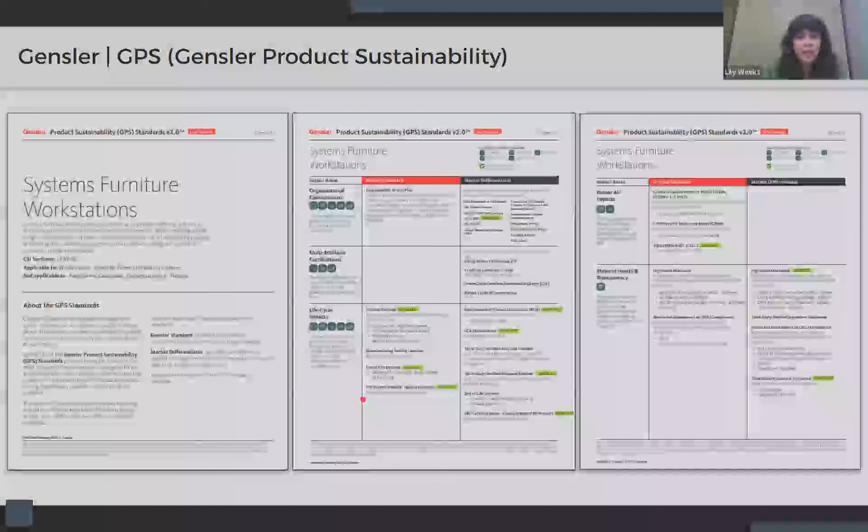But one of the exciting things I found is they're really starting to tackle sustainability standards for systems furniture in a way that has a minimum standard and a market differentiator. I think this is probably the most comprehensive market signal I've seen from the A&D side that really gets down to the brass tacks of things.

I know in my time at WRNS we created something similar, but more from the architectural finishes and interior finishes standpoint. Now we're really starting to see what we were seeing in the material standpoint start to permeate the furniture industry, which is very exciting.

I call these market signals because oftentimes these things can be aspirational, but these are the things that really move markets and make manufacturers take notice—if large architecture and design firms are seeking these aspirational ideas for systems furniture, they're likely to move forward and respond with their upcoming products.

And all of this is available on Gensler's website, and it's open source. So if that's something you'd be interested in seeing for your future projects, it's kind of interesting to read.

The second section I'm calling Design for Disassembly. As I had mentioned, last week I was in Chicago. Every year there's a furniture event called Neocon, which is the Super Bowl, if you will, of the furniture industry, where all the new product ideas and thinking behind commercial interiors as they relate to furniture are shown.

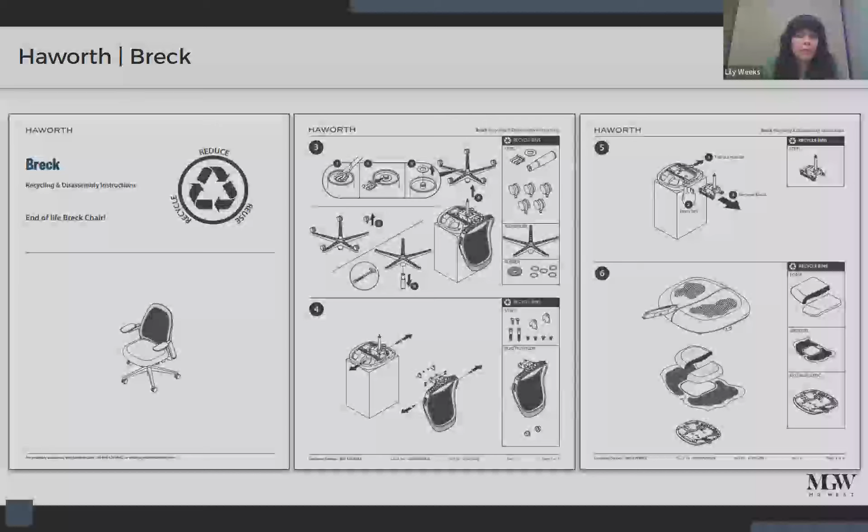Moving towards a great product category—this is that task chair, and on their website, what I found interesting is you can talk about design for disassembly, but at the end of its life, does the person, the facility, or the owner really know what to do with it? So this chair comes not only with assembly instructions, but disassembly instructions, which I have never seen before on a piece of furniture. That was exciting to me, seeing how this chair disassembles. It starts to outline the materiality of each type so you understand where it can go as you're thinking about its end of life.

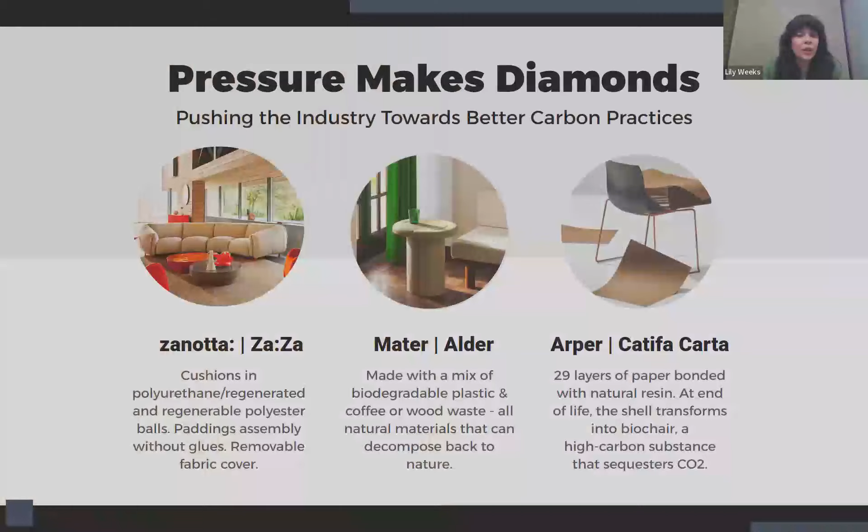This next section is very similar to the last one, but not necessarily about disassembly—just thinking about how, as we apply pressure to the industry, we can really be part of creating interesting and beautiful products that we want to include in our projects. Two of these manufacturers we saw earlier, but certain manufacturers had more of an ethos towards it, so they might have different products that address carbon in different ways.

For example, Zanotta—this is the Zaza sofa—and all of their sofas had fully removable covers. I'd say over the last maybe 3 years, I started seeing more removable covers on things, for a few reasons: cleaning, and being able to have things reupholstered more easily. Oftentimes with commercial furniture, if you want to reupholster something, it actually can't be, unless it's done in the factory because of the way it's made.

So it's really interesting to start seeing more manufacturers adopting removable elements to give flexibility in the future. I don't know a ton about what makes these foams more sustainable, but I've been hearing a lot more rumblings about the types of foams used in sofas. I also just really loved this sofa because it was very comfortable and also very striking.

This center table is related to that chair we saw earlier. It was designed by Patrizia Ercolia and won a lot of design awards. This is also one of those biodegradable plastics, made out of coffee and wood waste. Really beautiful design—it comes in olive, terracotta, and a mauve tone, which is interesting.

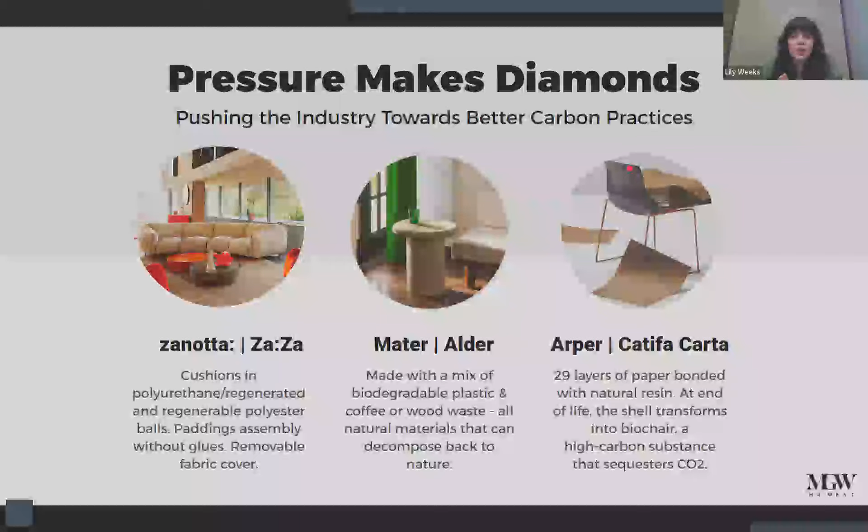But this chair was really interesting because it's made entirely out of bonded paper and natural resin, so it can sequester carbon. They brought the chair into the office and had a piece that was half bonded and half unbonded, so you could see the paper as it was compressed together, which was really interesting.

The other thing I liked about this product was that it inherently took the materiality, the inherent quality of the paper they were using, so it only comes in one finish, which almost looked like leather. But I thought that was really cool because that tells the story of the materiality and that we are specifying things that have a connection to the original intent.

One of the interesting stories as well was the end of life management. At the end of its life, it transforms into biochar, which sequesters CO2.

Really interesting story that Arper has a chair that's just called Catifa, and one of the things that they're doing is taking some of their historic product and figuring out how to make it more sustainable. On some other products, they're starting to remove the staples, the glues, thinking about the materiality of things while still maintaining the integrity of the design. So I'd recommend that one.

And then I wanted to add some strategies here at the end. In 2020, I was interviewed by Metropolis magazine about my experience going to Greenbuild in 2018.

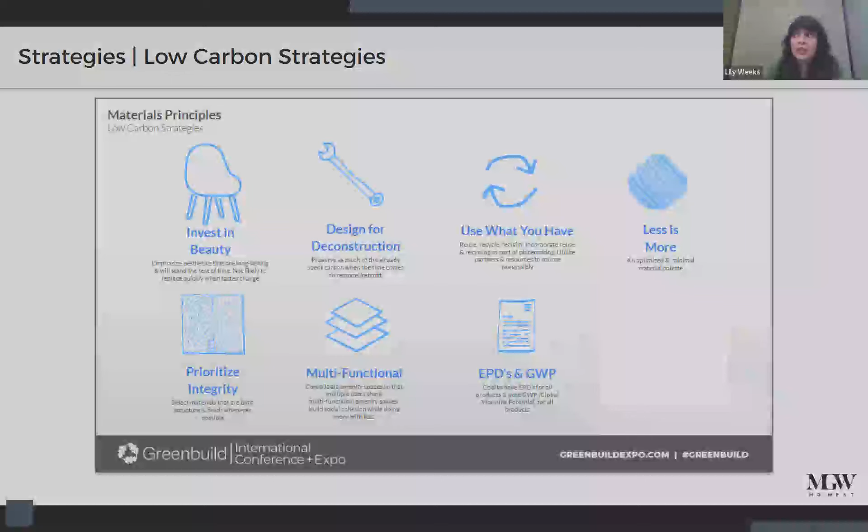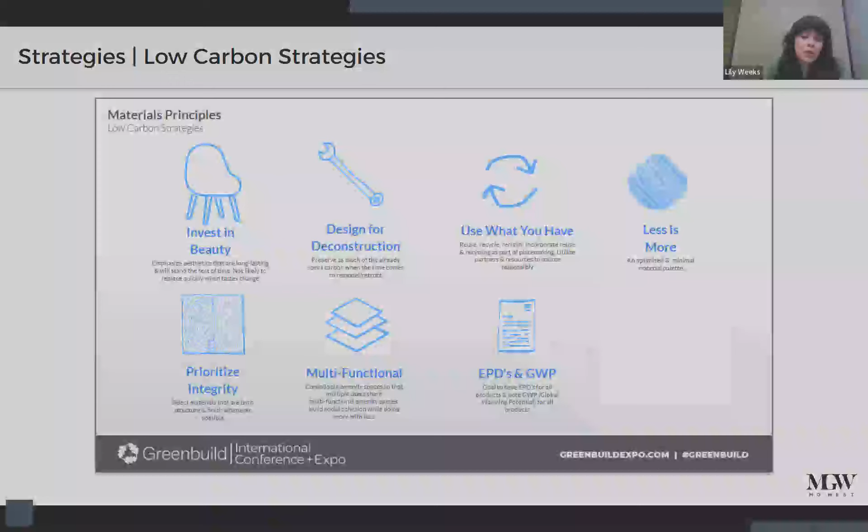And then you can ask for EPDs for furniture. Not everybody has them, but more manufacturers are starting to provide them. There's significantly more product and it changes rather quickly. So you can ask. They are not always available, but it is interesting to see that it's moving in the market. Maybe 7 or 8 years ago, I couldn't find an EPD for an interiors product, and now they've become very ubiquitous. So you should always ask.

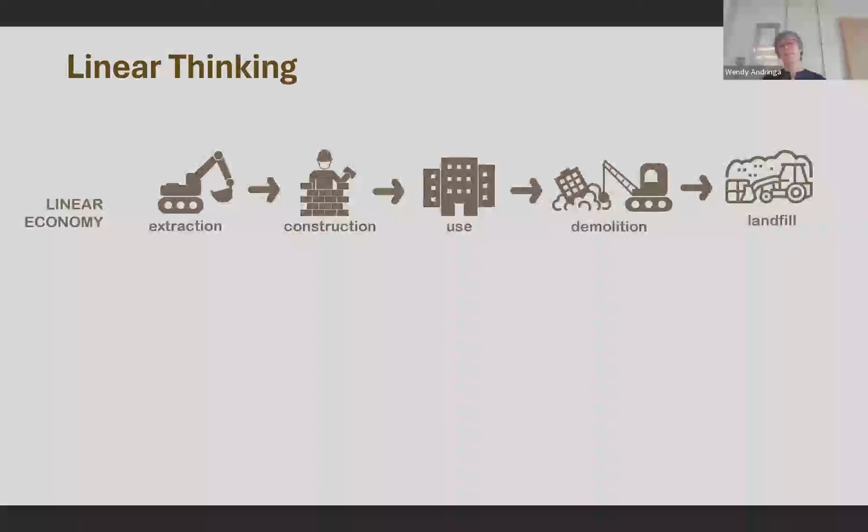So I wanted to start by just talking about circular thinking because I'm going to share a lot of our work that incorporates reuse of materials. And I wanted to talk about how salvage and reuse is one effective path towards decarbonization in our work. So the status quo that is just omnipresent right now is linear thinking, and that involves extraction. And also, after materials serve one use, they are demolished and go to landfill. And this is basically take, make, waste.

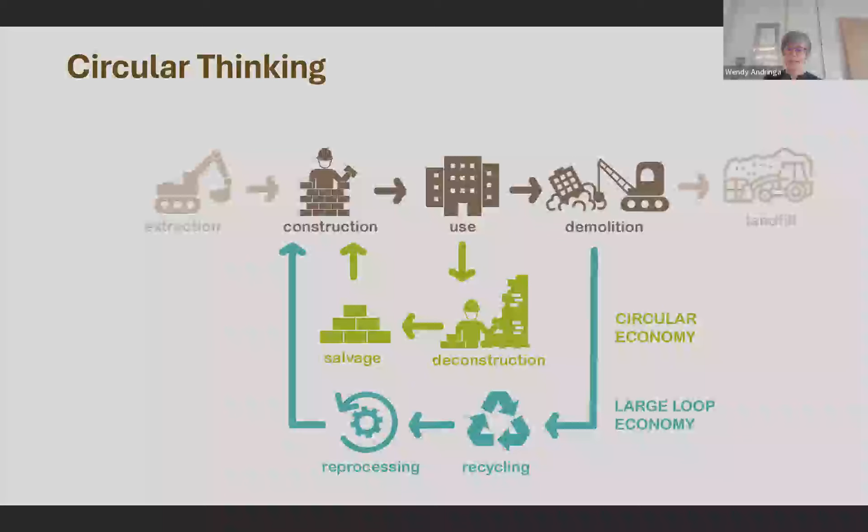And so this circular thinking is eliminating, as much as possible, the extraction of new resources and also diverting material from landfill and keeping it in two types of loops. The circular loop is deconstruction instead of demolition, going to salvage and reconstruction, or else the large loop, which is recycling and reprocessing materials that go back into new construction.

And so what we're interested in at Assemblage is really how do we make landscapes from deconstructed materials? So a lot of materials that are not sufficient structurally for reuse in structures are perfectly fine to reuse in landscape. And so that's really what we want to capitalize on, how do we recoup that material, and we're also always moving towards calling it resources and not waste.

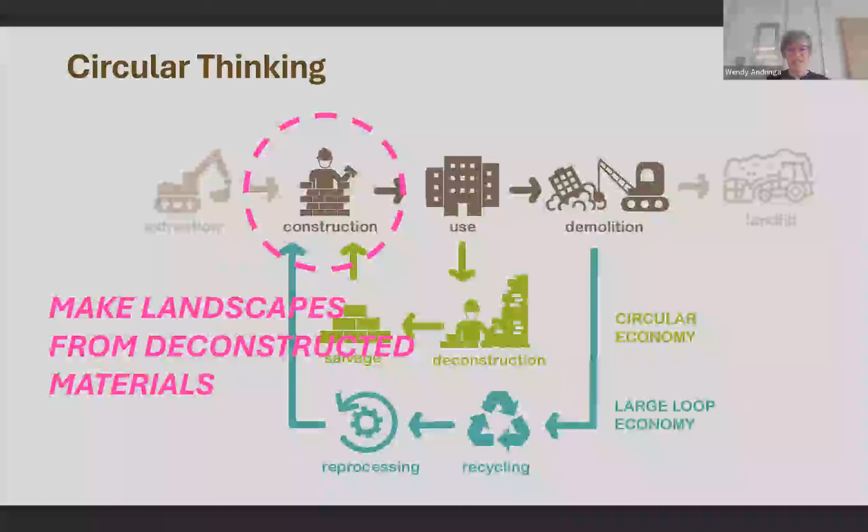So Laura asked for me to present some sort of ninja tactics, and I'm going to start with a project, a small community park that we designed in Gowanus, which really was all about being resourceful and using as much of the resources that were coming from large-scale demolitions in the neighborhood around us, in order to be resourceful and also creative. So everything you're looking at here in our project was salvaged, reused, or got procured from a city agency such as OER that reuses soil and things like that.

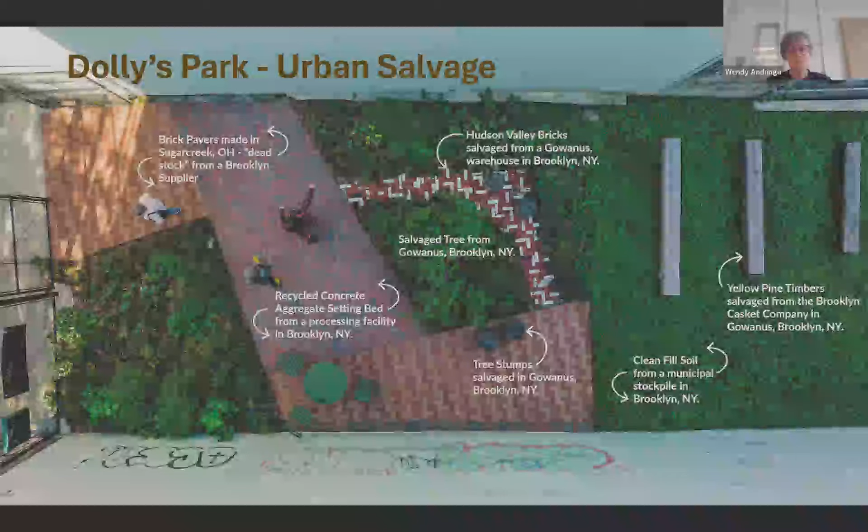I'm going to talk about two of the more salient features here in the project, and one was the timber benches. We reclaimed wood from the South Brooklyn Casket Company that was being demolished a block away from the park. We kind of stalked this demo project as it was underway. And we were very stealth about getting over there to find out from the site supervisor if we could have access to some of those timbers for a community park. And ultimately, they agreed.

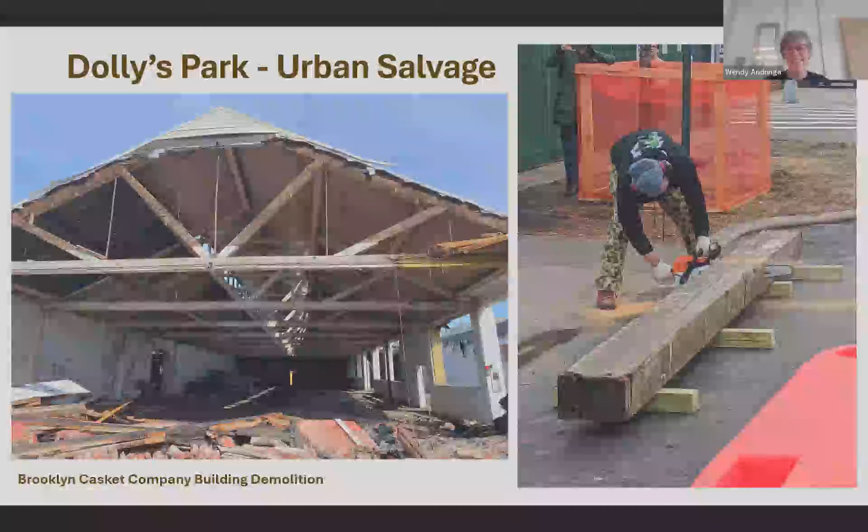And here you have it. This is about as ninja as you get, cutting the beams to size on the sidewalk with a chainsaw. And so this was very successful for us, and it sort of opened the gates for, okay, what else is out there and what else is available.

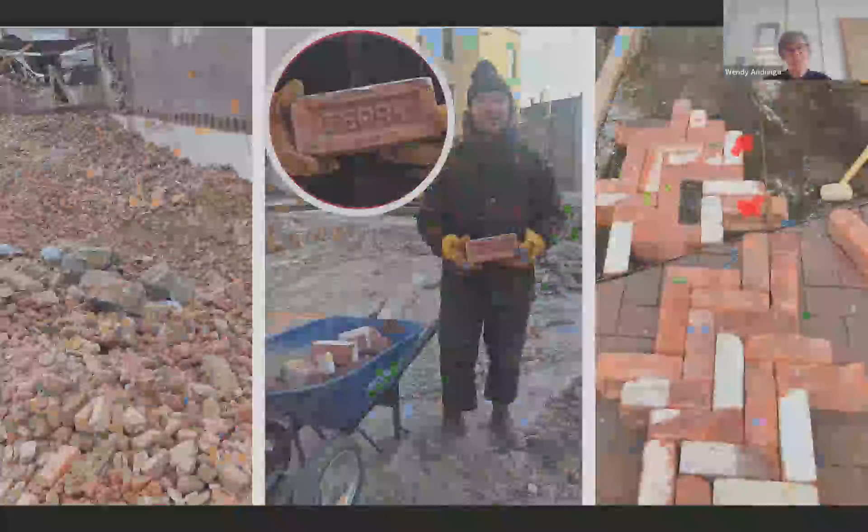We also looked at reclaiming bricks that were there. The warehouses around us were all coming down around the same time. So we worked with Field Form, a design build firm here, and they were very expert at also getting access to the sites. And as you can see, demolition is not very kind to materials. So unfortunately, what they had to do was really glean and pick through all of the rubble. But they did end up finding a lot of material that was fully intact. And we used that to create small garden paths.

We would have liked to have done the whole park with this material, but unfortunately it was very difficult to find enough for the whole park. So this just goes to show you how important deconstruction is instead of demolition. And I wanted to note here, this led to a research path for us about learning about the histories of these materials. In the enlargement there, you can see the logo that's stamped on this brick. The term is a frog, and it basically identifies the manufacturer of the brick. And we could trace this brick back to a brickyard in the Hudson Valley, where most of Brooklyn's bricks came from in the 1800s.

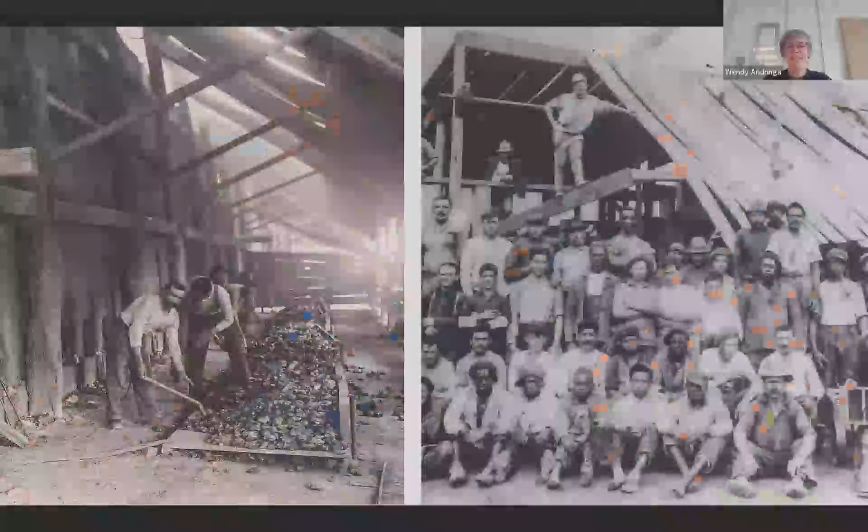So there's history here. If you think about how perfect this unit is and how much labor and carbon actually went into producing it. All these bricks were made from coal-fired ovens, and there was a long legacy of labor. So every time we demolish those bricks and crush them and haul them to landfill, we're sort of erasing a really important part of history.

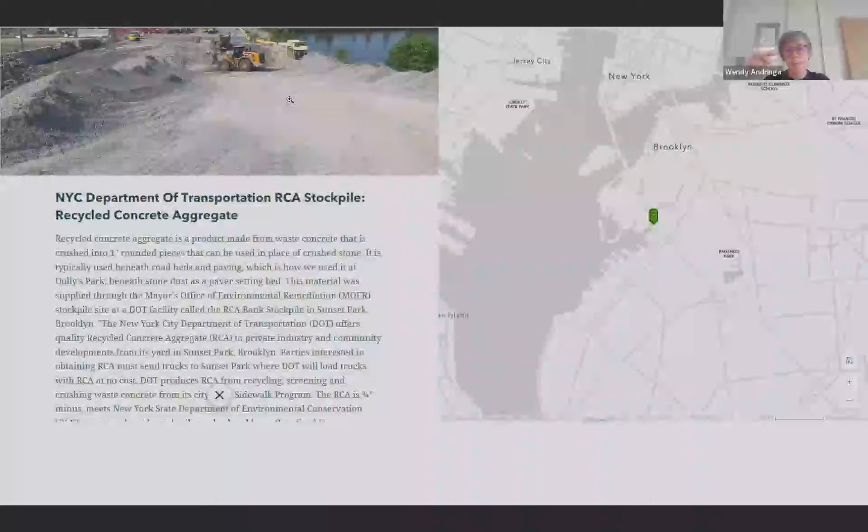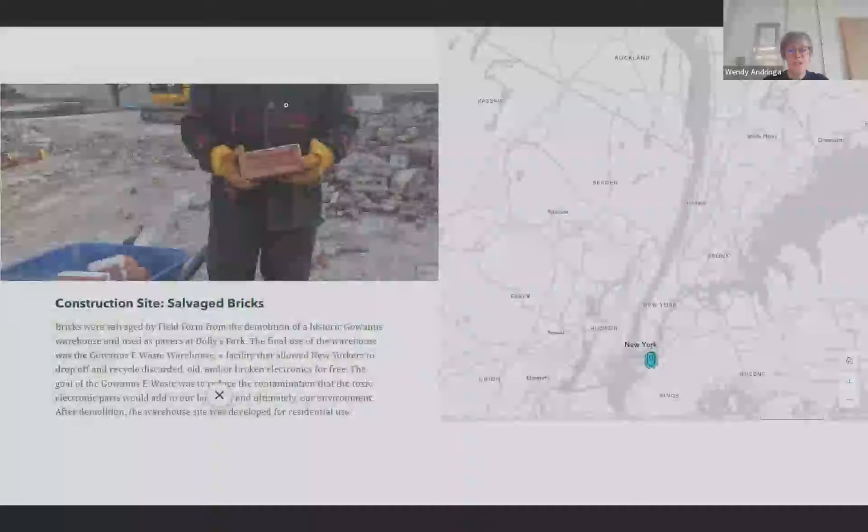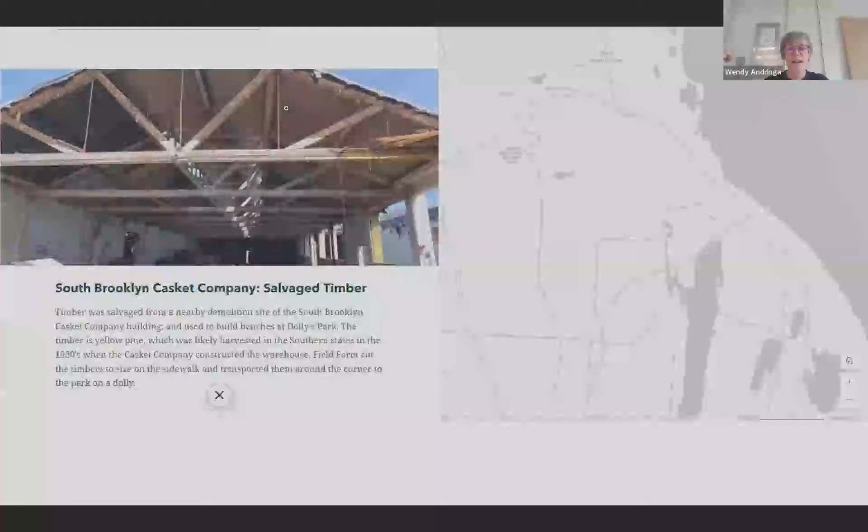So that opened up a process for us of thinking about where did all of the materials in our park come from, and how can we map that? So this is a story map that we created to basically map every single component of the park, from the soil to the concrete blocks, to also tell the story of the salvaged bricks. Even the trees that we planted in the park were salvaged from another lot in Gowanus that was going to become a sewage tank storage site.

I guess I can stop this now, but I just wanted to show a little bit about this process. We just think that tracking materials and showing their histories is really important.

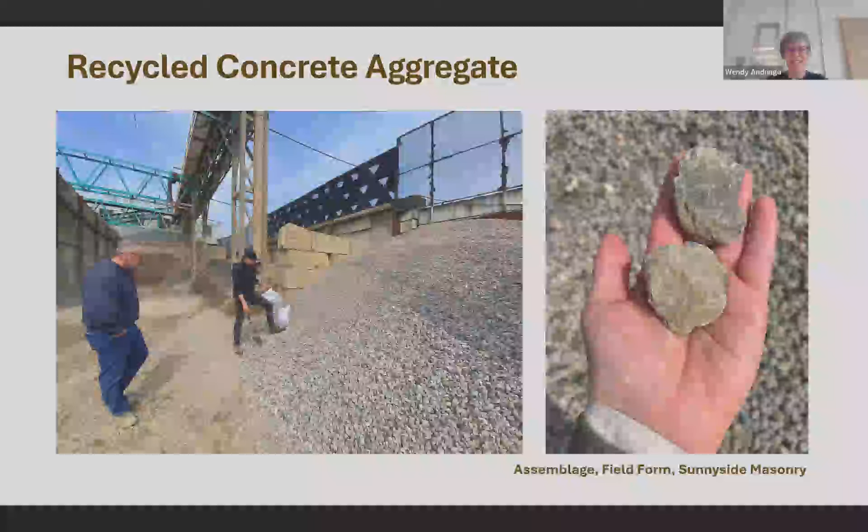And the owner was very interested in what we were doing. Obviously, he's hoping that more people can explore uses for this, because right now the primary use is as setting under new streets. So once you start to wash this material and look at it a little bit closer, you realize it's a little bit of everything. It's brick, asphalt, concrete. There is some stone mixed in there, so you name it.

Bulk waste is basically transported there, dropped off, and they sort it, they wash it, they sieve it, and crush it to make this material. And basically, we consider it bits of New York City from everywhere. And so they do periodic testing of it. So we took samples of it and we cast it into some pavers.

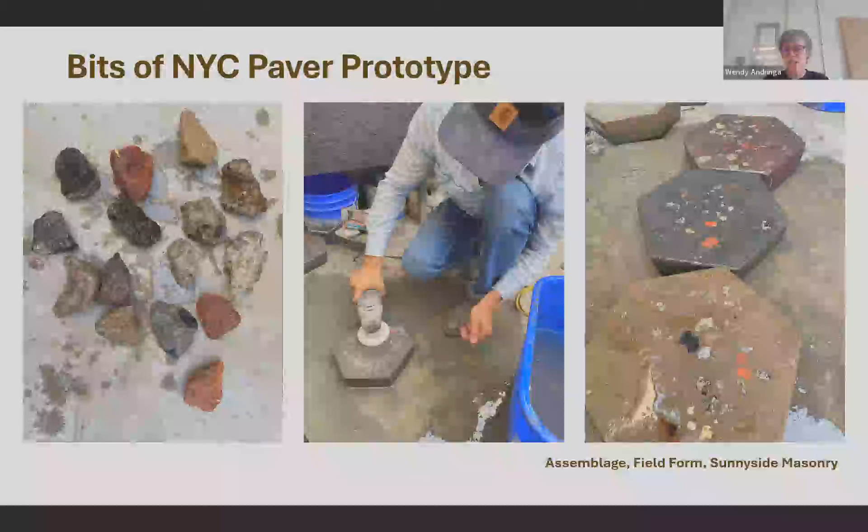We created a hex paver and then finished it with a grinder similar to terrazzo, and we were really excited about the results. We're still exploring the best ratio of the matrix so that the material comes through. But for our first pilot, we were very excited about it.

We also are very interested in exploring the reuse of all materials on site, and often we end up having to take down a lot of trees in our projects in landscape. So we're always thinking about how we can reuse those. So we're designing a climate adaptive waterfront park in Hudson, New York. And part of the design there is to raise the shoreline in a key area. And we're doing that because sea level rise is going to be encroaching on the park by 2050.

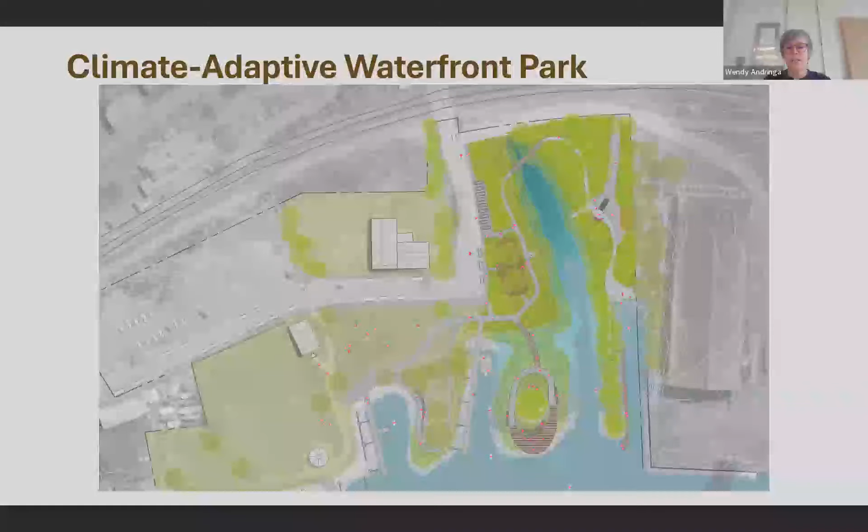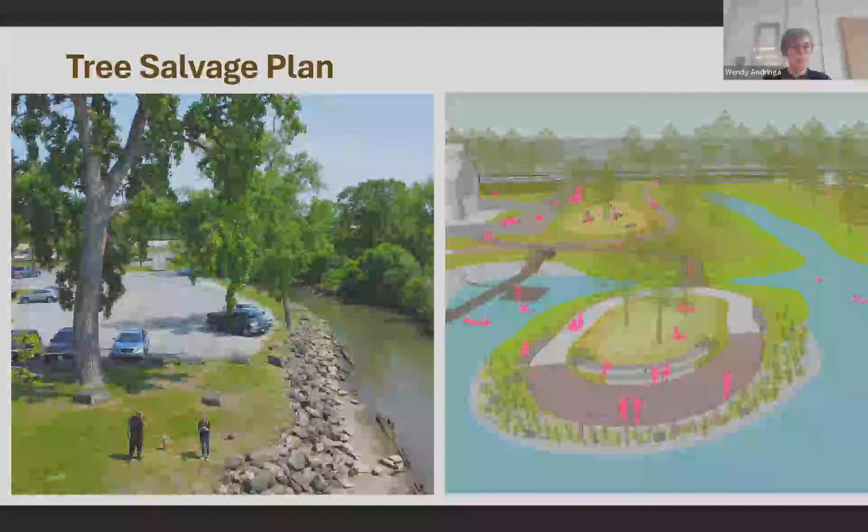So one thing is we have these enormous, beautiful cottonwood trees on the site, which have to go because we're going to be raising the grade. So we started to think about how we could use all of this wood. And so we did a tree salvage inventory, looking at each tree, kind of like, this reminds me of how they sort of map out the cuts of meat on livestock. But we had to do this in order to understand exactly what we had to work with and how we were going to use it.

So we modeled the material, and what you're seeing on the left is one tree sort of dissected in three different options of how we could reuse that wood. So all the bark will be stripped and it'll be sealed, and we're going to reuse all of these pieces in different ways to create a sort of natural playground for the project. And the community is very excited about this approach. So when it's difficult to lose beloved trees, this is a really good solution.

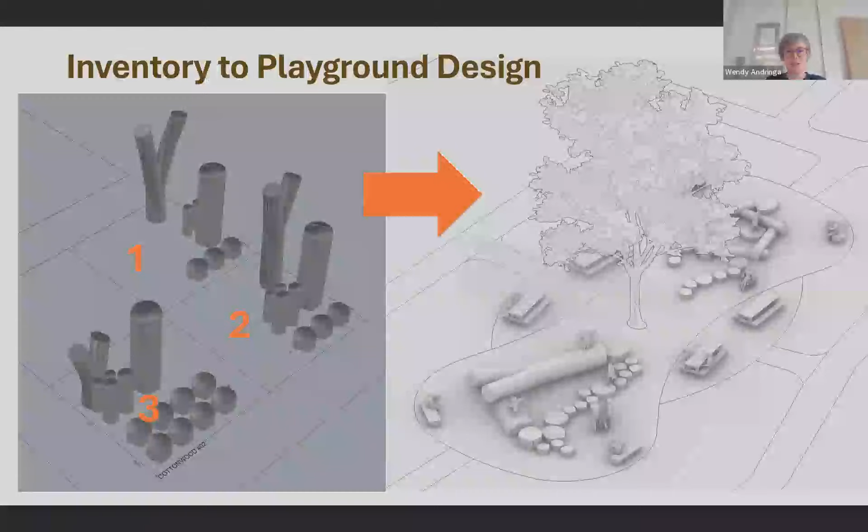We also work on the waterfront at the intersection of land and water. And so we're working on a new pier design in New York City. And this is a typical shoreline with a seawall, a little bit of riprap, and then the seafloor sloping down pretty quickly. And so generally, this is when we are asked to sort of restore more of a live edge around our shorelines. This is what we're starting with.

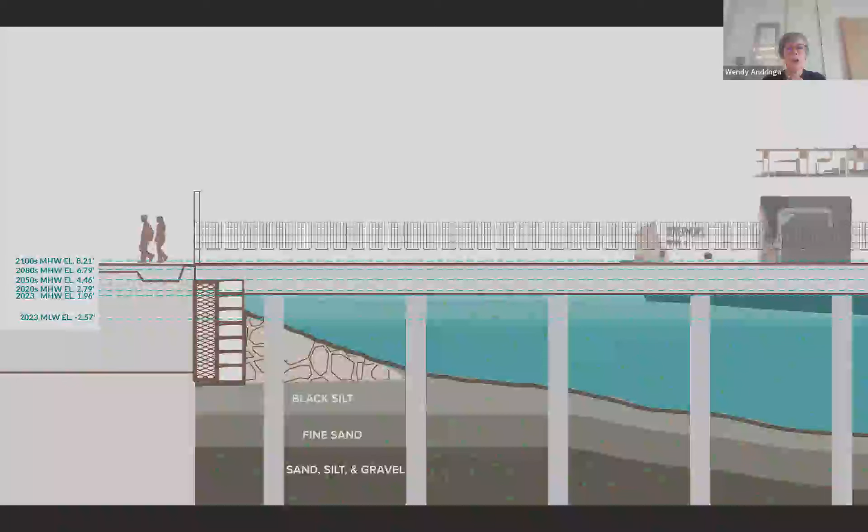And so our initial research told us that what we're dealing with on the seafloor is this black silt. It's very mucky. And so because of the repeated dredging in our harbor and also the hardened seawall, you end up with an area that's sort of devoid of life. There's a certain amount of life in this intertidal area and on the rocks, the riprap and the near shore, but once it drops off, it

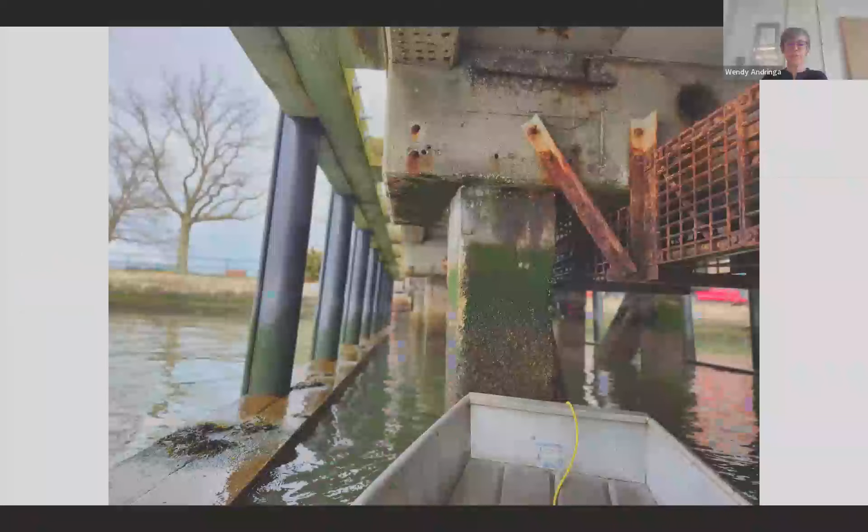gets pretty blank. And we heard time and time again from ecological nonprofits that whenever they try to put gabion baskets or restore the muck down there, it ends up just sliding right down. And so part of what we were doing is taking apart an old pier and building a new one. The old pier has to remain operational. The new pier is going to be constructed next to it.

So we started thinking about, well, okay, we already have these piles that are there, and what we're going to do, we proposed, is remove the slab on top, but keep the piles as a feature that we can use to stabilize some of the marine restoration that we're going to do. They're already in place. There's no need to remove them, and they can become a salvage feature for the new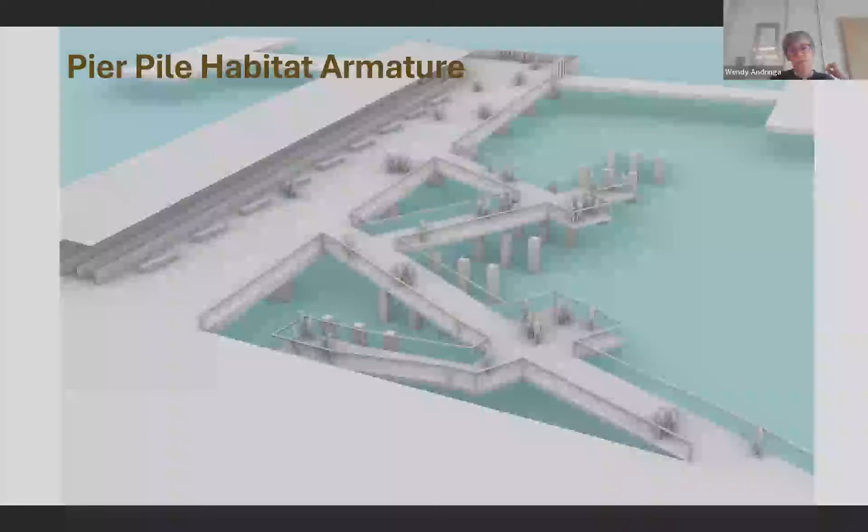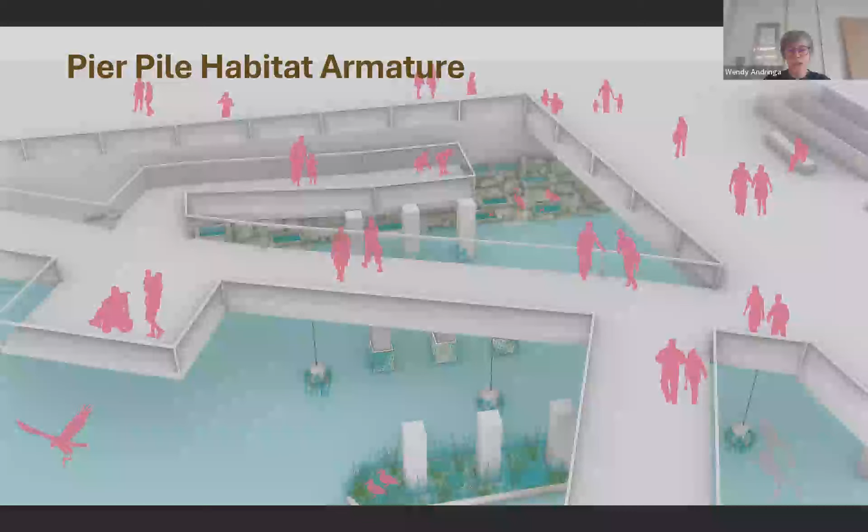restoration. So in tandem with that, we're proposing sort of a catwalk that would walk over those piles, so that the public can see what's happening down beneath. And the piles then would be an anchor for all of the new pile jackets or floating wetlands or everything that we're going to propose in this area. So this is another example of talking early, when the team is starting to talk about demolition, and finding out what kind of resources are existing that you can work with.

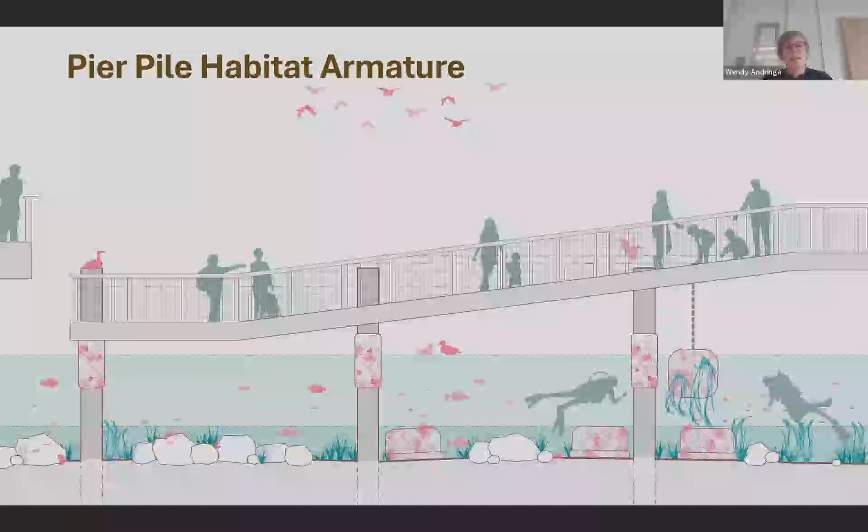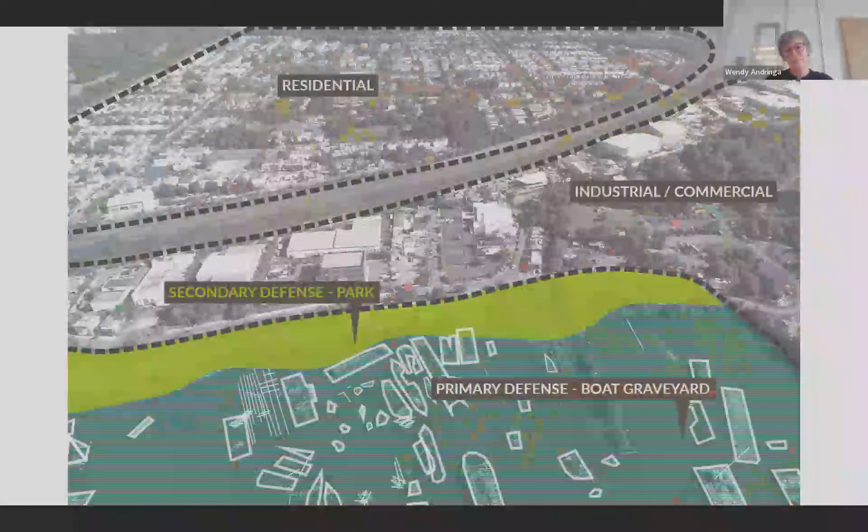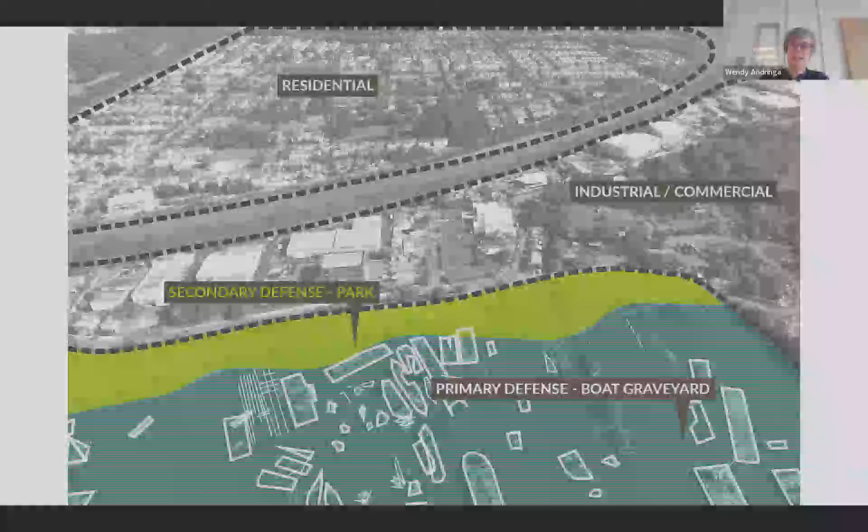So as part of our proposal, it was not to cleanse this area, but to actually embrace it. And we started to look at how this could be used to create new habitat and exploration. There's nowhere to take all of these boats. They're definitely going to stay here. So we also looked at how the boat graveyard serves as sort of a primary defense against storm surge and sea level rise. So one thing we explored is, how do the ghost boats actually start to mitigate storm surge and become a wave break, reduce the energy so that we don't just have a floodable park, but this can all serve as a line of defense against storm surge.

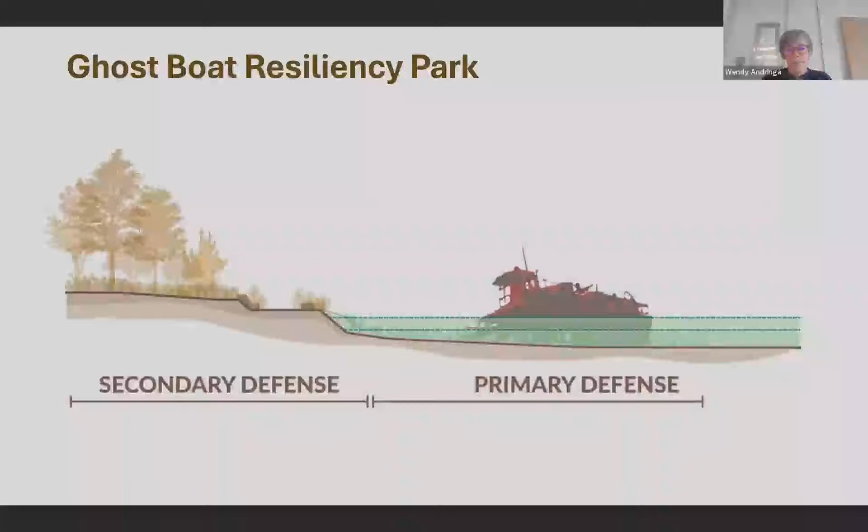So I just want to finish up here about the importance of thinking circular. And I also wanted to mention a couple of tools that are sort of landscape focused tools. One is called Carbon Conscience, and the other is called the Pathfinder Decarbonization Tool. Both of these are very helpful during the design phase for sort of evaluating how long it will take for your design to become climate positive and start sequestering more carbon than is in the embodied materials. I don't know, however, at this point, how well it incorporates and would calculate and have metrics for reclaimed and reused material in the landscape.

So for now, think about how to adapt and reuse everything that you have on site first, even before you start tearing it down, and then keep that material on site. Talk to your landscape architect about how it could be reused and do that early. Innovate with that, and also innovate in the techniques that you use to find the material, and also think about where your material is potentially going to go. And then lastly, as in the boat graveyard example, embrace entropy and don't sanitize your site.